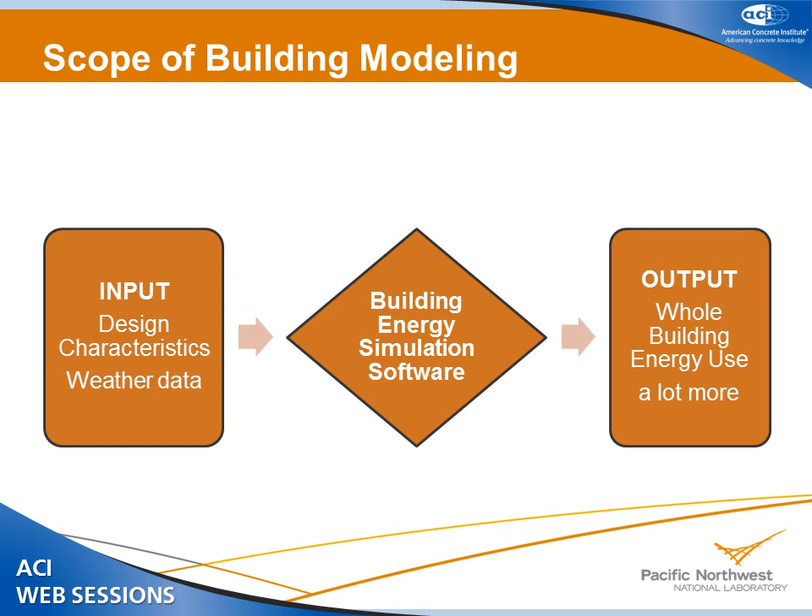And after the calculation, the output of the software is the whole building energy use, and a lot of other information, for example, the zone temperature, whether the load has been met or not, the energy use by day, hourly information, and also total annual energy use.

So what can we do with energy simulation? What's the use of it? We can use it to evaluate energy efficiency measures, EEMs. Let's say you have a particular building design and you want to alter it a little bit, for example, change the window-to-wall ratio or increase the insulation. What benefit can I get?

You can use energy simulation to build a model for your original design idea, and then model another building, which is the alteration of that building, and look at the energy difference. That tells you how much energy you can save or lose by doing this alteration. And then if you put your cost in it, then you can calculate the life cycle cost, whether this is the cost-effective investment for doing that.

The other application is to show design compliance. As Steve has just mentioned, ASHRAE Standard 90.1 is a baseline building code, meaning that any state that adopts this code will build the building to at least meet the minimum requirement of the 90.1 standard. However, most of the standard is written in a prescriptive way, so you have to meet everything. But designers can have the flexibility to change it a little bit.

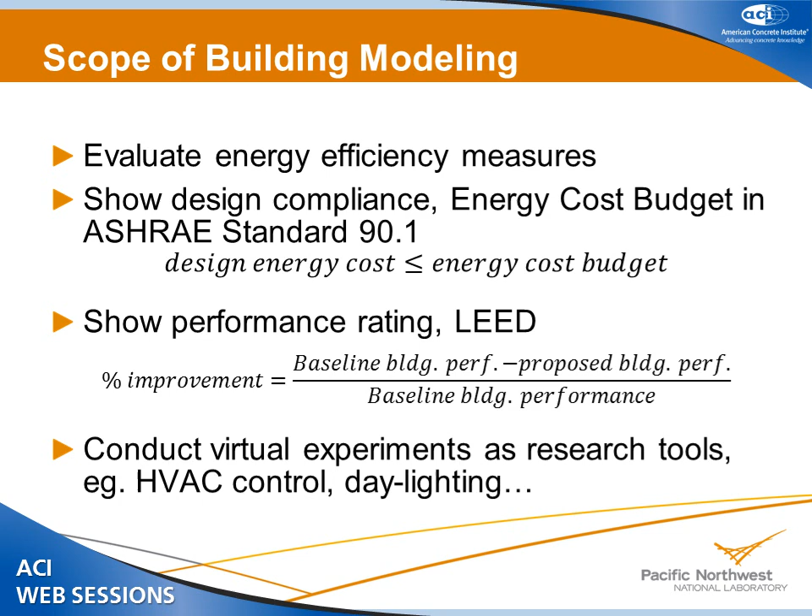Last but not least, we can use energy simulation as an experimental tool to test different research, for example, to study HVAC control or daylighting and other applications.

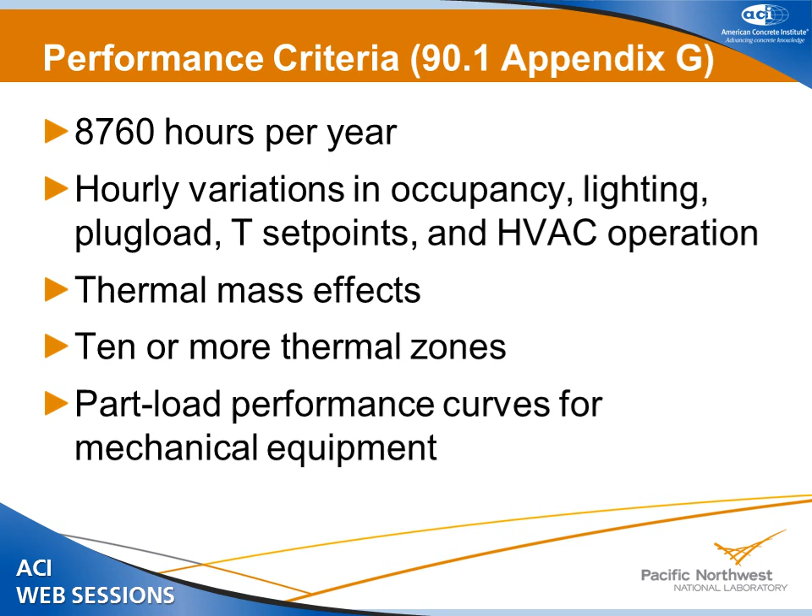So I referenced the performance criteria from 90.1 Appendix G to say what the building energy simulation I'm talking about needs to be. The criteria include that you have to be able to model the building performance hourly in a year, and to reflect the hourly variation in occupancy, thermostat control, and operation of your HVAC system. Specifically, it also requires the software to be able to model thermal mass effect and be capable of modeling more than 10 thermal zones, and other requirements. And the last one, mentioned in previous presentations, is that ASHRAE Standard 140 is a standard to qualify building energy programs so that they can at least ensure some confidence in your simulation result when you use it.

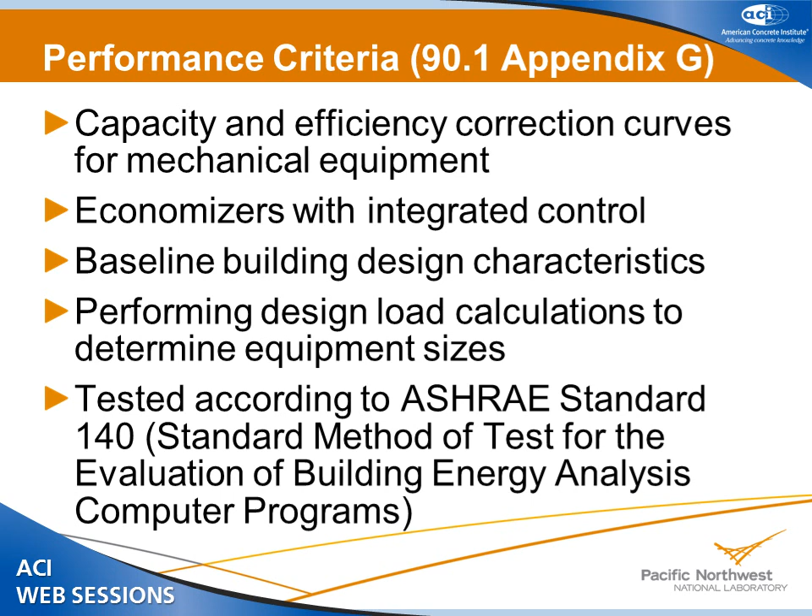So I'll use an example in EnergyPlus to show the options you can use to model heat conduction. The transfer function method was mentioned by Professor Haber. The transfer function is an algorithm where the heat flux through the surface of an element can be calculated based on the history of the surface flux at this surface and the temperature history at this surface. And the CTF, the conduction transfer function coefficients of the element, are also in this equation. This is just a simple idea. The thermal mass is counted within this; the material properties are used to calculate the CTF coefficients.

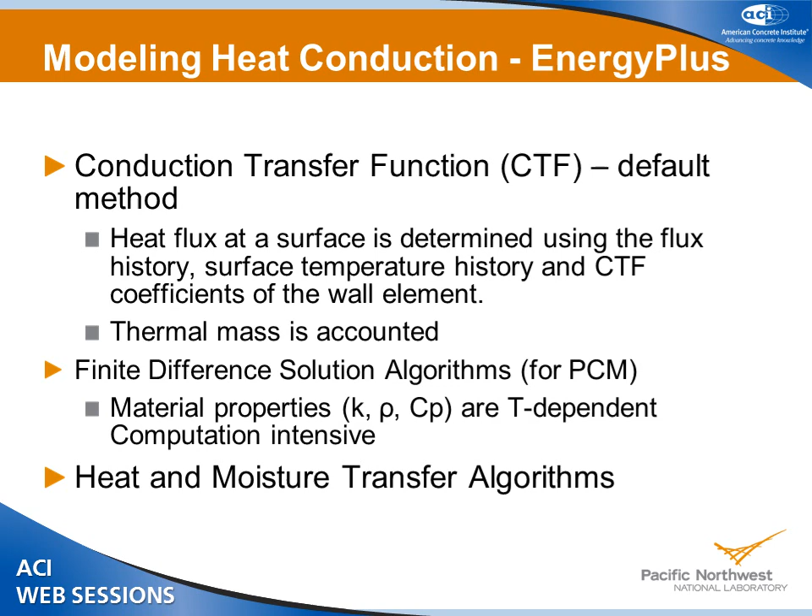If your material properties, conductivity, density, and other parameters change with temperature, then you should use this method. An even more advanced method can model heat and moisture transfer, but this method usually costs more computational time, and the user also has to input a lot more information to describe the material.

So back to the default method, the basic input from the user: you need to define your material. A material requires the thickness, the density, conductivity, and specific heat capacity. Once you define multiple materials, you can compose them into a wall assembly. In this example, the first layer is a concrete panel, the second layer is cavity insulation, and the third layer is a gypsum board.

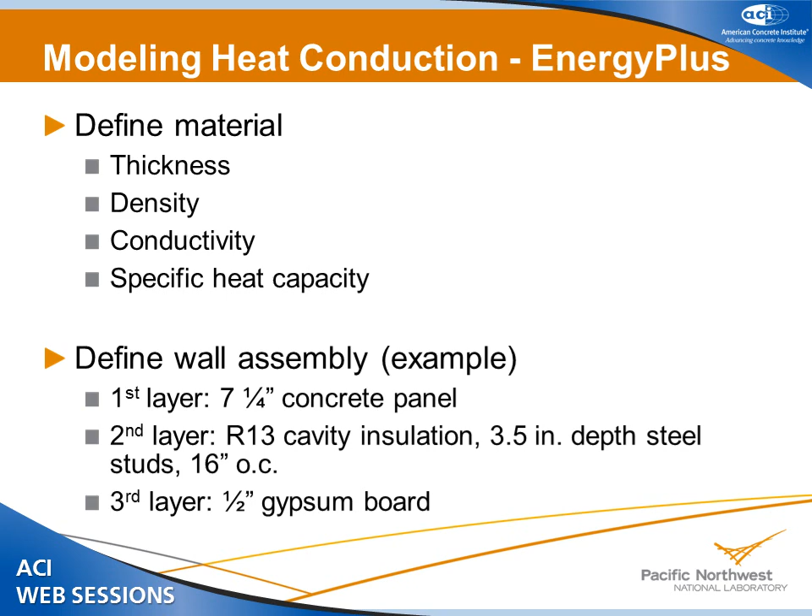I want to mention that the second layer actually has two-dimensional or even three-dimensional heat transfer. But in current simulation software, all heat conduction is considered one-dimensional. So when you input the thermal property of the second layer material, you have to consider the effective thermal resistance or conductivity and the effective density. Then you will be able to capture the property of that layer.

So now I'm going to turn to some examples of how our lab uses energy simulation for research. The first example is a retrofit project where we helped a large retail store retrofit their 1987 building in Virginia. The objective of the energy simulation is first to calibrate it based on the known operation schedule and occupancy information. We know the historical energy use, the utility bill of the building, and we also want to conduct an energy audit. After the model is calibrated, we can use it to evaluate the potential energy saving and impact of different retrofit measures.

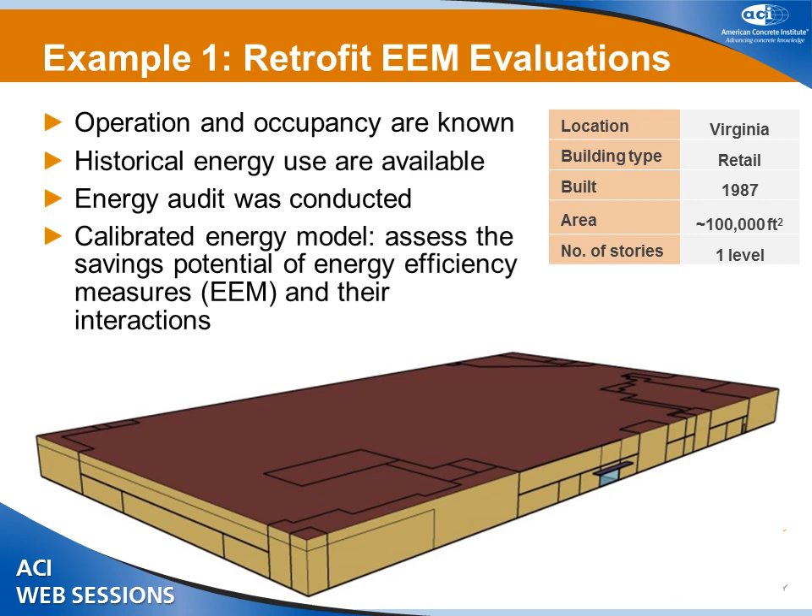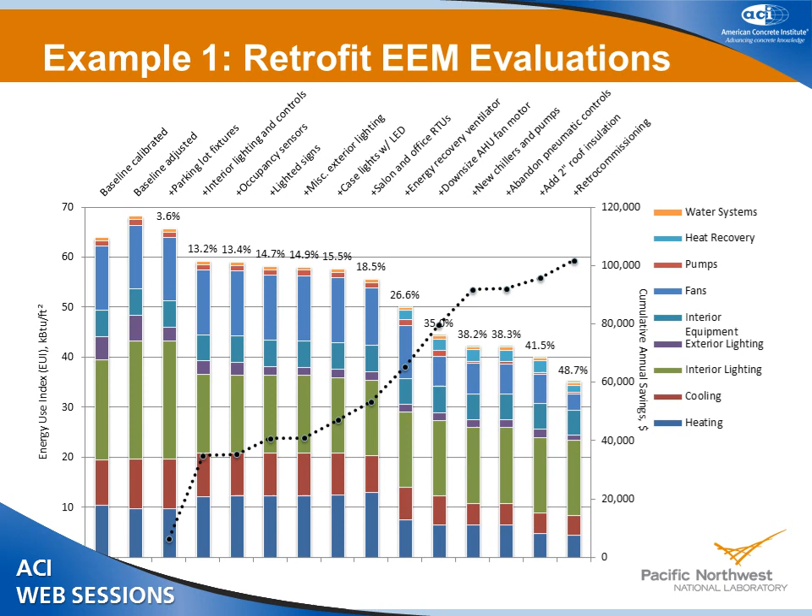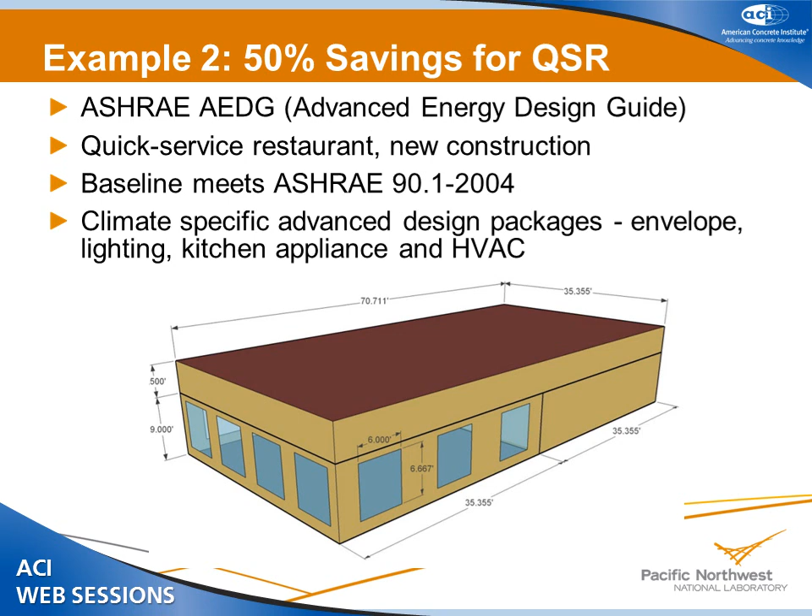The second example is a project under ASHRAE Advanced Energy Design Guide development. We looked at new construction for a quick service restaurant. This is the schematic of the building. It's quite a small building, with just two zones and one plenum. This is not an actual building design, but we want to use the simulation to develop a climate-specific advanced energy design package, which includes HVAC, lighting, envelope, and all aspects of the building, trying to save 50% energy. So it's related to design for different climate locations.

The result shown here, again on the left, is annual building energy use, and the different colors show the energy use. We modeled the same building prototype for 17 climate locations, and each location may have a different design package depending on its actual climate. We reached the 50% energy goal for two cold climate locations, and for the others we were able to achieve over 40%. One of the reasons we were not able to reach 50% is that restaurants, especially quick service restaurants, have a lot of energy use for appliances, their cooking appliances.

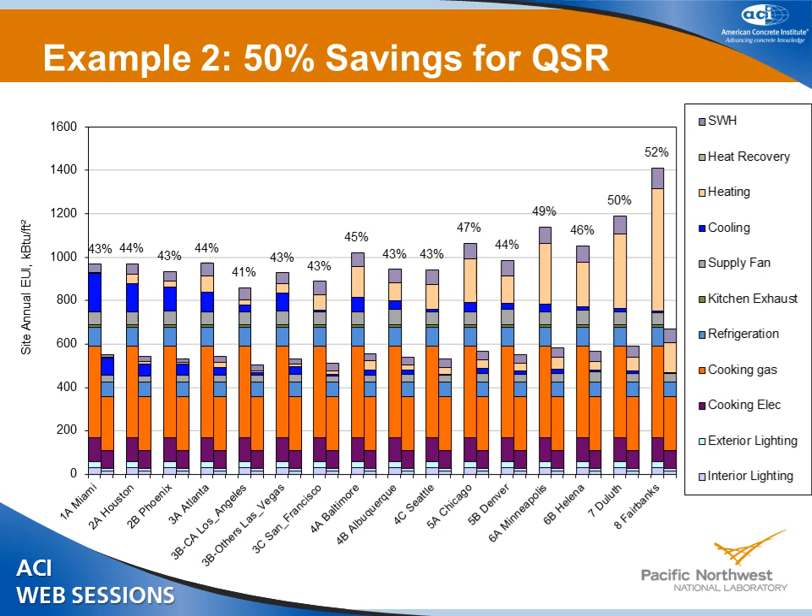So those we don't have much measure to control or regulate. The third example I want to mention is some work that PNNL did helping ASHRAE Standard 90.1 on their continuous maintenance process. ASHRAE Standard 90.1 keeps evolving and periodically republishes the standard by including different new requirements, and it's moving towards a more energy efficient way.

So before 90.1-2010 was published, the standard committee and DOE had the goal to target nationwide energy savings to reach 30% energy saving and energy cost saving. So when the Standard 90.1 committee worked very hard to improve their requirements, we wanted to measure how much progress they had gotten, and for each added addendum, new requirement, how much energy gain we can receive. So that's the goal of the project.

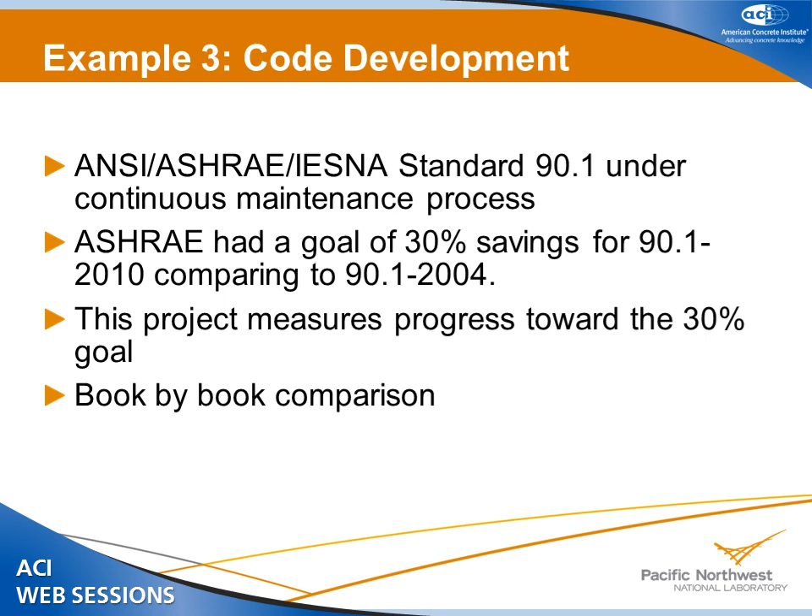And what we did in the methodology is to build a baseline model based on 90.1-2004 prescriptive requirements, and the other suite of models to represent the new requirements written in 90.1-2010. So in order to be able to cover all building prototypes and all climate locations, National Renewable Energy Lab and PNNL together developed a suite of building energy models. We call them prototype building models.

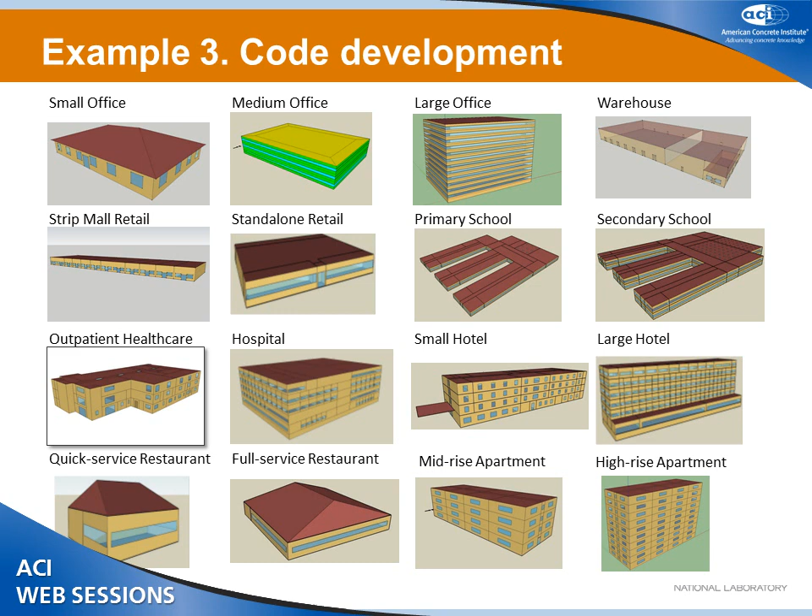They cover different sizes of office, different types of retail, restaurant, healthcare building, hotel, apartment building, and by a survey of recent new construction for different climate locations, we conclude that these prototype buildings cover 80% of the U.S. new building stock. And in order to represent different climate locations, we model each of those buildings in 17 climate locations.

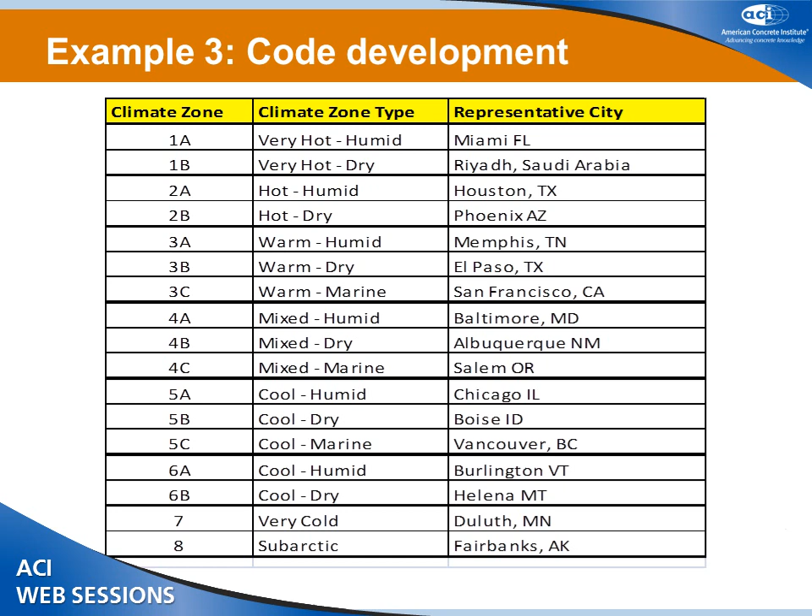This is the overall building simulation results. To create this graph, we had to model 16 prototype buildings. Each of them has 2 standards, and for all of them, we had to model 17 climate locations. So that's a lot of building simulations together, and then we had to post-process the simulation results in order to get the national weighted average.

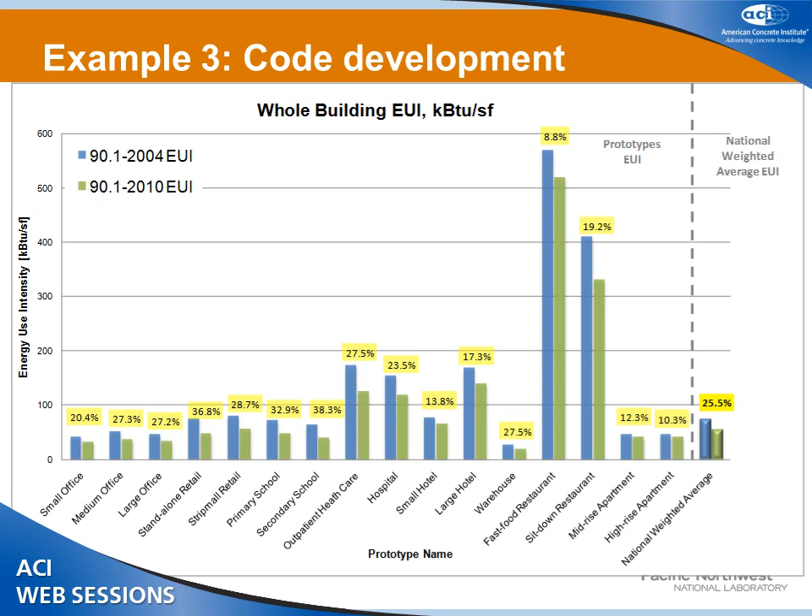So on the horizontal axis, you see different building prototypes, and the last one, highlighted, is the national weighted average difference between 90.1-2004 and the final published 90.1-2010. Here you see around 25.5% energy saving, but the goal of 90.1-2010 was energy cost saving. So we have to consider the cost for therms and electricity, and since 90.1 does not regulate some plug loads, for example your appliances, we took those out of the denominator, and then we were able to claim that 90.1-2010 achieved its goal of 30% energy cost saving.

So in summary, energy simulation programs are tools to help us evaluate EEMs. They can be used to show code compliance or performance rating of a building. We also can use them to research different ideas. The community has created performance criteria and even Standard 140 to ensure confidence in simulation results once the program has been approved using that test method. And current programs can account for thermal mass and even moisture transfer through the building envelope, but they require more computation time and detailed information, which is probably not available to every modeler. So this is the limitation that we currently have and the world that we live in.